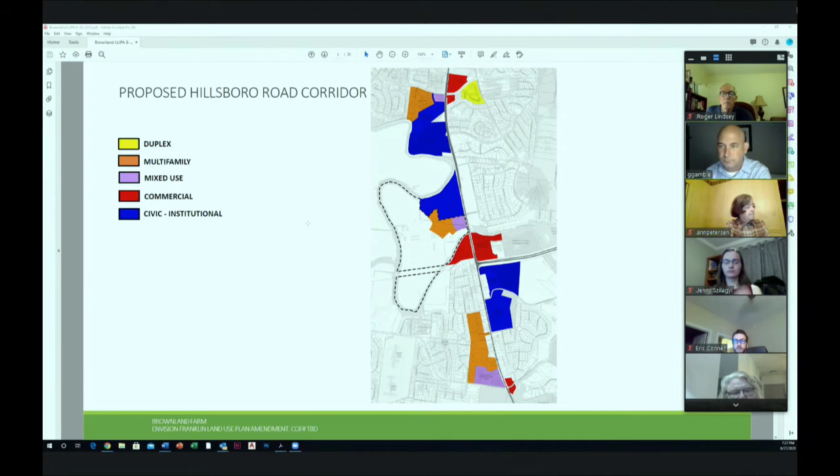The orange includes multifamily, and the purple includes mixed use. So along Hillsboro Road, there's a mixture of single family detached homes with localized commercial mixed use areas and multifamily. Our previous plan showed a total of 27.9 acres of multifamily and 7.1 acres of mixed use. Following the joint conceptual workshop, we have reduced those two areas significantly — multifamily is now 16.1 acres and mixed use is 6.1 acres.

Within the multifamily, we have an area set aside for senior living or assisted living facility. It's currently within the area owned by Christ Community Church and is zoned civic institutional, so this use is allowable within the civic institutional base zone that's on the property today.

The additional multifamily area we're referring to is here in orange, just below our main entrance road, and would consist predominantly of for-sale condominium homes with a few for-rent multifamily apartments.

We had our sixth neighborhood meeting last night with great involvement and engagement, and discussed the mixed use buildings shown here. Several neighbors asked us to increase the distance off of Hillsboro Road to provide more landscape, and gave us comments that they like the mixed use component to allow for maybe a restaurant, coffee shop, some live-work offices or office lofts close to their neighborhood.

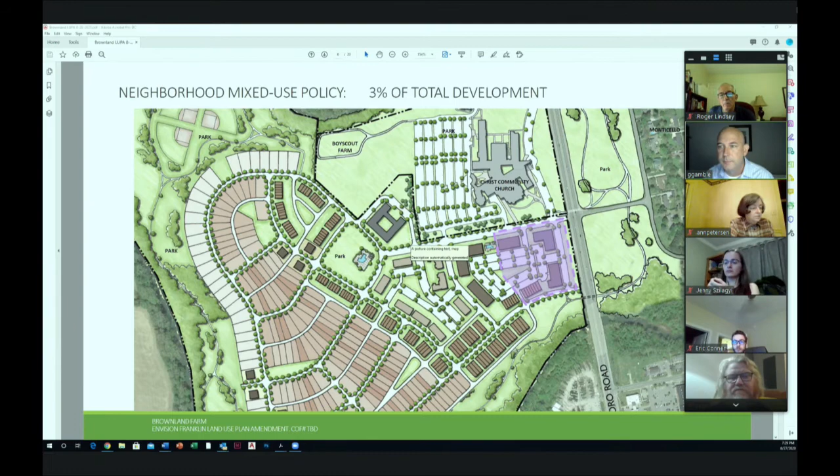We are also addressing the scale of the buildings on Hillsboro Road in our future plan. Again, I understand you're not approving the plan tonight, but there is relevance toward the Envision Franklin Plan Amendment in reducing these buildings to two-story in scale. In our SketchUp model, you can see the relationship and proportion to the existing church adjacent to it — these would be the mixed use buildings here in the front along Hillsboro Road.

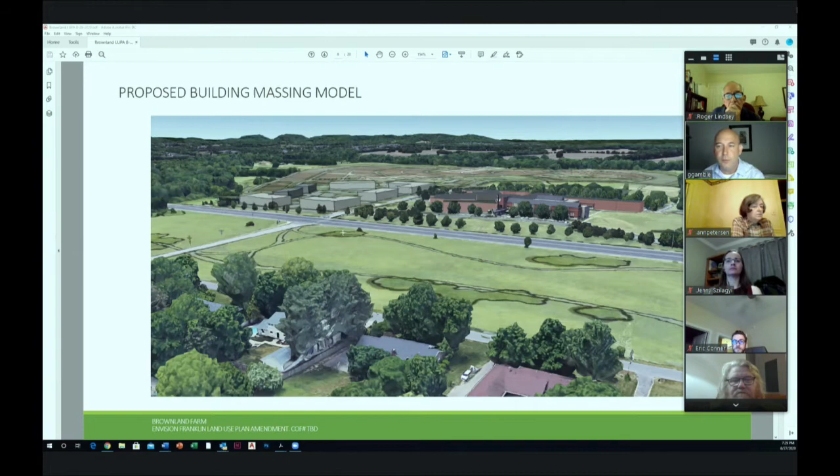So why are we asking for mixed use and multifamily? A lot of this goes toward language within Envision Franklin about creating a vibrant neighborhood. We are very excited about the opportunity to bring a mix of housing types — the condominiums and townhomes would be maintenance-free living, and it really caters to a much wider, larger group within the city of Franklin and meets more housing needs.

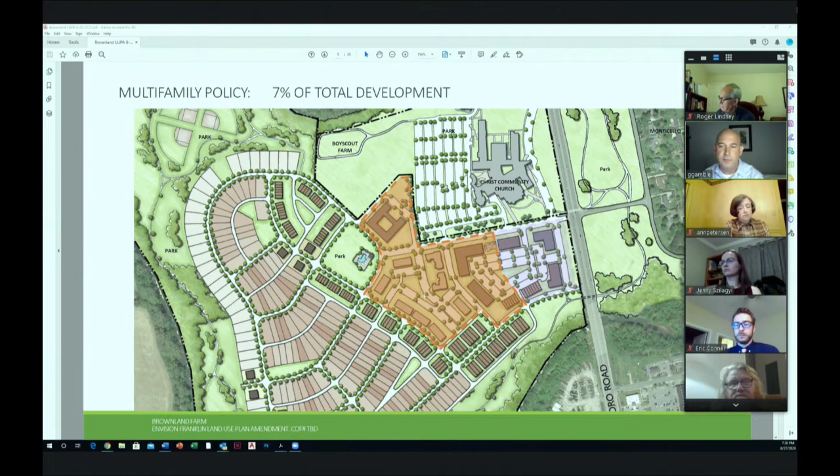We are committed to at least 10% of the homes within all the housing types being affordable housing, and we'll be working with the Williamson County Community Housing Partnership as well as the Franklin Housing Authority to create commitments associated with the deeds of these properties that would keep the affordable housing in perpetuity.

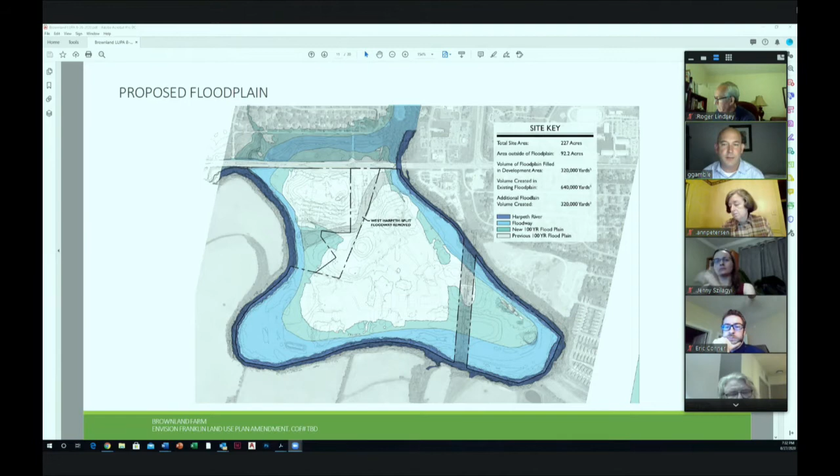This only would occur during a high water event. What we're proposing to do is redistribute the volume of the floodway. It does decrease the square foot area of the floodplain, but it does not decrease the volume. We have a total of 320,000 cubic yards of floodplain that we are removing, and we are adding back in 640,000 cubic yards, so we're doubling the storage capacity of the floodplain on this property.

To give you some real effect, this is to the south. Right here is where Mack Hatcher and Hillsboro Road intersect. Franklin High School is just to the south of us here. This is today's 100-year floodplain.

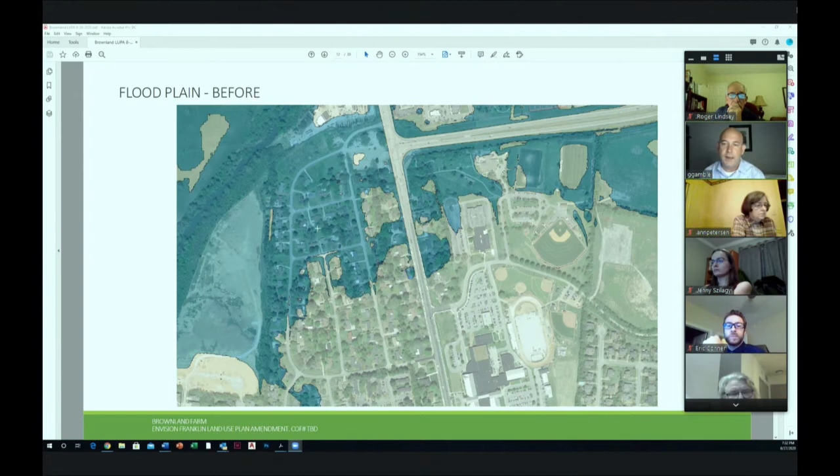After the creation of the 2-to-1 floodplain storage, you can see the real reduction in the effects on the adjacent properties. Several homes are currently in the floodplain, and that floodplain would be removed from their property.

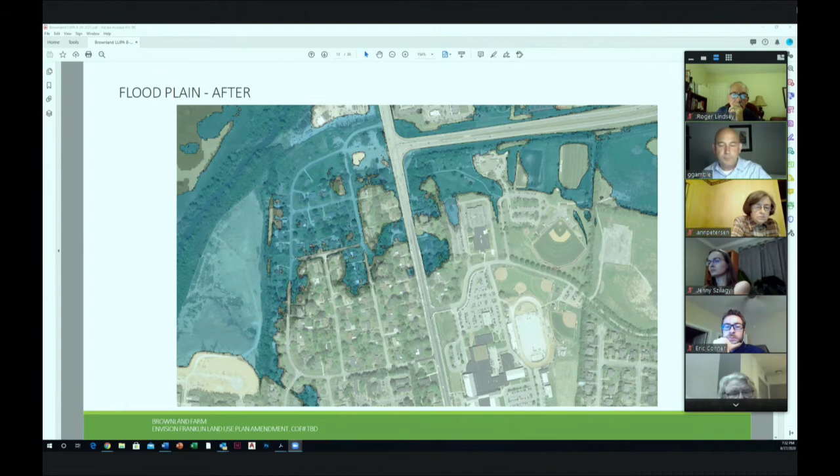If we move forward with the development plan, we have the ability to file the CLOMR prior to or concurrently with the development plan for FEMA's review. The CLOMR is typically not submitted until site plan, and when we go to site plan, there are some grading items subject to change that may require us to resubmit to FEMA. But for the comfort level the community has asked for, we would be willing to do that, and we'll continue to discuss this with the City of Franklin Engineering Department.

This is a comparison between Brownland Farm and Water's Edge. Water's Edge is a total of 195 acres in size, Brownland Farm is 227 acres. The development area created at Water's Edge is 92.1 acres, and the development area at Brownland Farm is 92.2 acres. The floodplain volume filled at Water's Edge is 290,000 cubic yards, and there were a total of 304,000 cubic yards created at Water's Edge.

This was prior to the city's requirement of a 1.5 to 1 creation ratio when filling in floodplain area. At Brownland Farm, we have the ability to double the amount of floodplain volume created, truly affecting those properties upstream and downstream. With the creation of the floodplain area at Brownland Farm, all single-family homes will be at least 3 feet above the floodplain, and no residential lot will have floodplain on it.

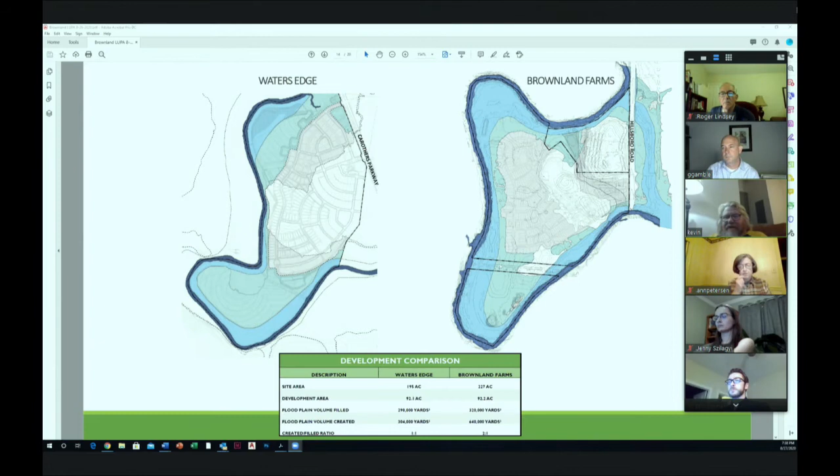I think we've lost Kevin's connection somehow. I apologize if I lose you. It says my internet connection is unstable.

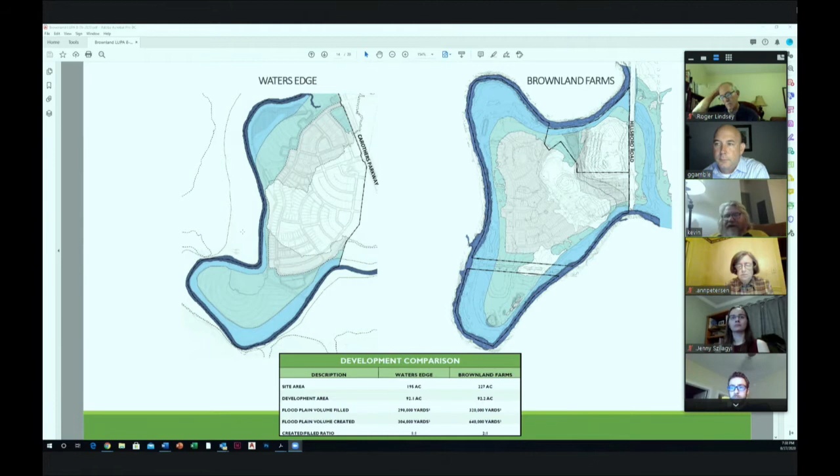We are basically just shaving the knob down. We can lower that elevation from 622 down to about 616, which is level with the bank, maintain positive flow, and we still have a sponge that goes from elevation 616 down to 598. We have 18 feet of natural sponge that would remain here, which is incredible. We don't have that in most floodplains to begin with.

We had a great meeting with the Monticello neighborhood last night. It was attended by dozens of people, and that was our 6th meeting. I try to wisen as I age, and what I ask them is, what is it y'all want? What is it that I can do to make my development be an asset to this neighborhood?

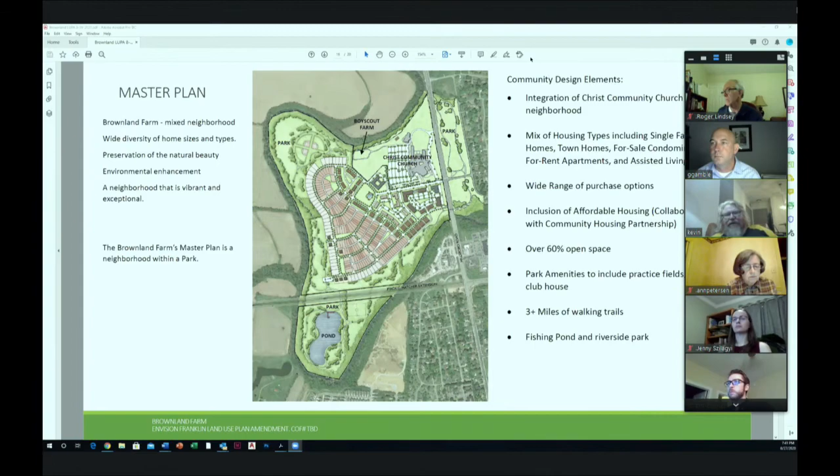But tonight, what we're talking about is a land plan amendment for, Greg, what's the exact area that we're asking to change here? It's 22 acres. Yeah, so it's 9% of the total property to multifamily and the neighborhood mixed use policies.

Not just that, but 12 of these acres we're purchasing from the church, which are already civic institution. And I think that's an important fact here, that a lot of what we're asking for is already out of the floodplain in this land plan, and belongs to the Christ Community Church that has already been changed to zoning of civic institution, which could allow things like assisted living.

So I wanted to speak slightly on the floodplain, and Roger and Mike, I know both are engineers. This Harpeth split is the craziest thing I've seen. We have ground elevations of 625.2 in several locations up in this floodway. This floodway cannot exist until it gets to elevation 626.

It is only 8/10, and then it flows through the detention pond of the church. In this floodway exists the driveways, the horse show attraction area, the high point of 625.2, and the parking lot of the church, and the detention pond of the church.

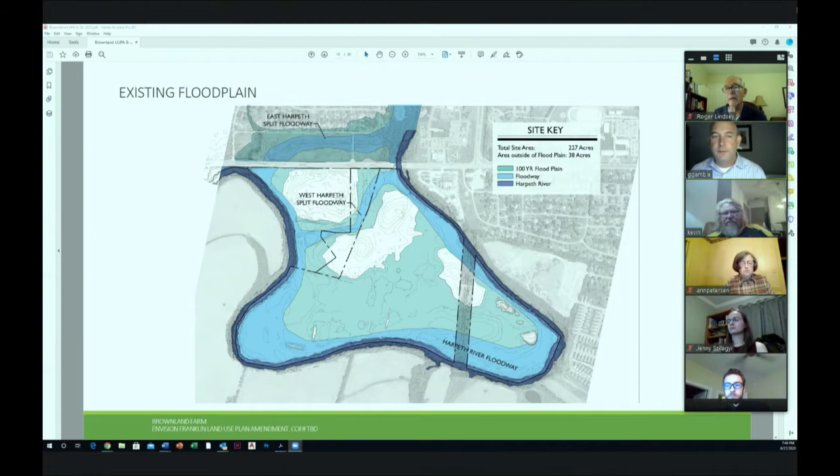So with that, we're interested in hearing your comments. We have requested deferral tonight to the September Planning Commission, and we'll present the traffic study findings the night of the September Planning Commission meeting. Okay, great, thank you. So from the Planning Commission, we've got a request from the applicant to defer to the September 24th Planning Commission meeting.

Do we have a motion to recognize that deferral? So moved. Is that Jimmy? Yes, sir. Second, Mike. Okay, so motion by Jimmy to defer to the September meeting, and seconded by Michael Orr. Did Marcia Allen ever join us this evening?

Okay, so Marcia's still absent. Jimmy Franks, your vote? Aye. Scott is absent. Roger Lindsey votes aye. Alma is still absent. Michael Orr? Aye. Ann Petersen? Aye. However, in our vote, whenever we're showing our vote, it said to adopt the Envision—is that going to be understood that we're deferring? Yeah, that's a motion to defer. Yeah, I see what you're talking about, Ann. So this is a motion to defer. And Jenny Szilagyi? Aye. Chairman Hathaway is recused on this item.

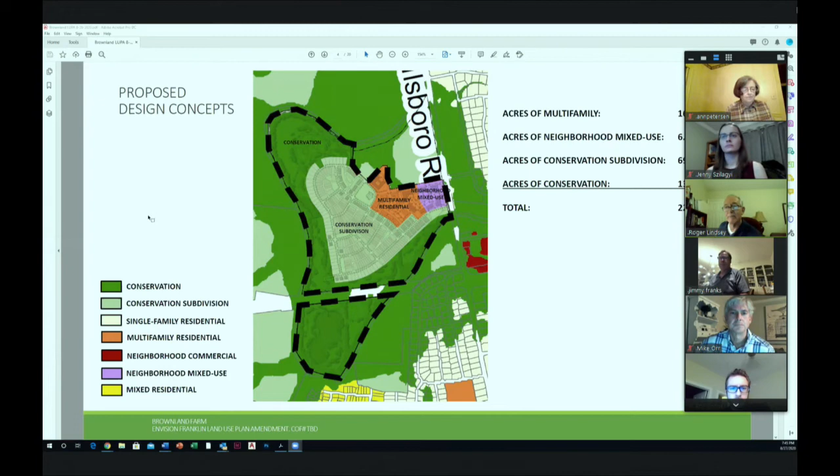So the vote passes, the motion passes to defer to the September 24th meeting. Thank you very much. Wait a minute. Okay, so we're good then. I'll return control of the meeting to Chairman Hathaway. Thank you, Roger, great job.

Staff: Thank you, Mr. Chairman. Just an electrical note—we just had a storm pop up here in Nashville and the lights just flickered, so if I cut out, that's why. The purpose of this revision to the Berry Farms Reams Fleming PUD Subdivision Development Plan is to revise the internal street network within the development. The subject property is comprised of 45.17 acres and is located at 1011 Reams Fleming Boulevard. There are no requests to revise the entitlements or change the development boundaries with this proposed revision, so therefore it is just a Planning Commission level approval, it will not go on to the Board of Mayor and Aldermen. The original concept plan for this property was approved in July 2006. A revised development plan incorporating the Ramsey Solutions headquarters campus was approved in March 2015. Staff recommends approval with conditions of the revised development plan for the Berry Farms Reams Fleming Tract PUD subdivision.

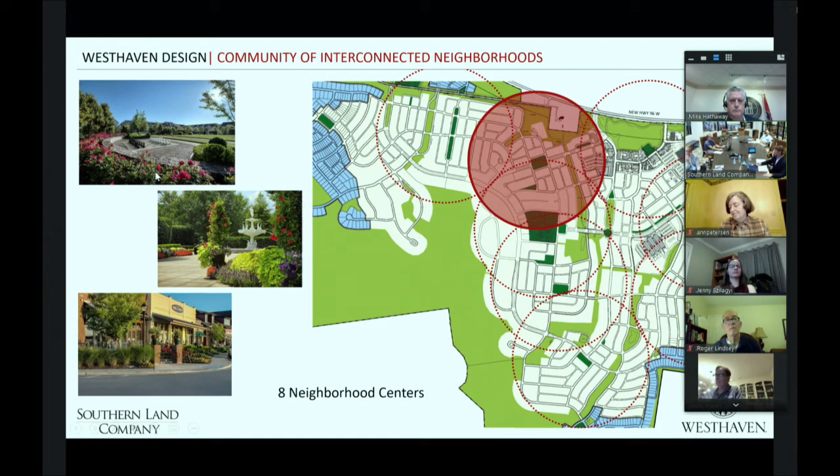So from Westhaven being a series of interconnected neighborhoods, the red circle is Founders Square - that's where the fountain is here on the left. And then from that point on, we have 7 more neighborhood squares in those outlined circles that really define the neighborhoods within those centers. Those are 5-minute walking circles, and they go from a commercial neighborhood to a very informal kind of square that we call Chess Park - a walkable and bikeable community, put together of many components.

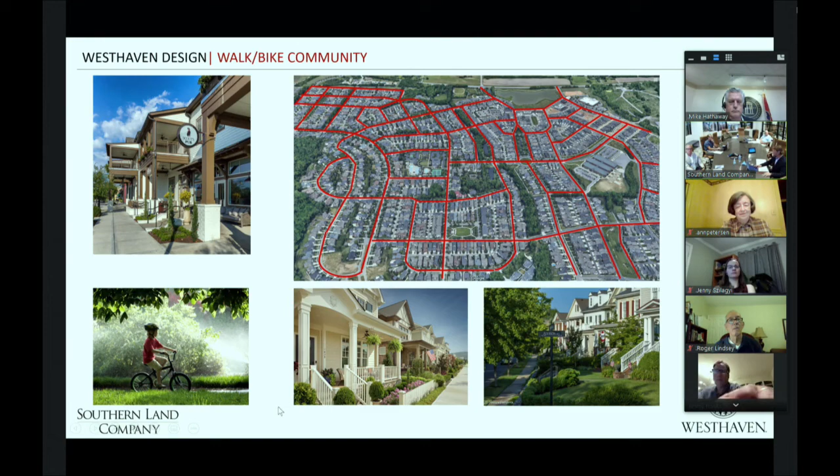One is a modified grid of streets that keeps the blocks short and allows people plenty of places to cross and walk. But it's also the detail in the walk - it only matters if you can walk, but if you want to walk between one place and another, that's what really matters. And then a place for kids to ride their bikes, learn how to ride their bikes, and feel free to move about the community.

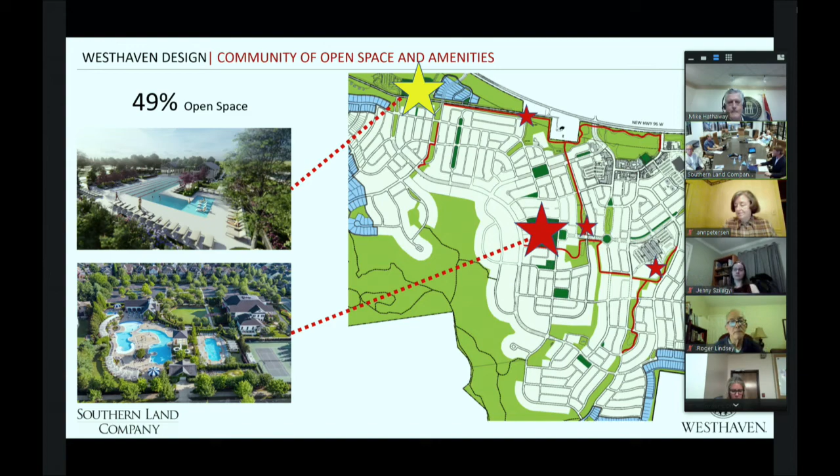And then a community of open space and amenities. We have 49% open space. The red stars are existing amenities, and the yellow star here is our pool that's actually under construction right now. Those are well placed and scattered throughout the community to make it convenient for our residents.

And then all of that would be for naught if we weren't really participating in making this a community of connection, allowing the events to occur, the activities that we sponsor to really make this place a community for people. And so we've applied all of those 3 main design concepts to what you're going to look at tonight.

Initiative 1 is on the west side, as Tim said. This is the property that we own, on the west side of Mack Hatcher. To orient you here, you'll see this map several times - this is Highway 96 and this is Mack Hatcher Boulevard. What we call Initiative 1 - I believe you got the letter we sent to our residents many months ago identifying this as Initiative 1 and Initiative 2. Initiative 1 is on the west side of Mack Hatcher.

What you see here is the yellow tinted lots are existing and the blue tinted lots are the proposed redesigned areas. So our current entitlements, as Tim said, are 500,000 square feet of commercial and 2,750 residential units. What we are proposing to do is remove 250,000 square feet of commercial and add 275 residential units.

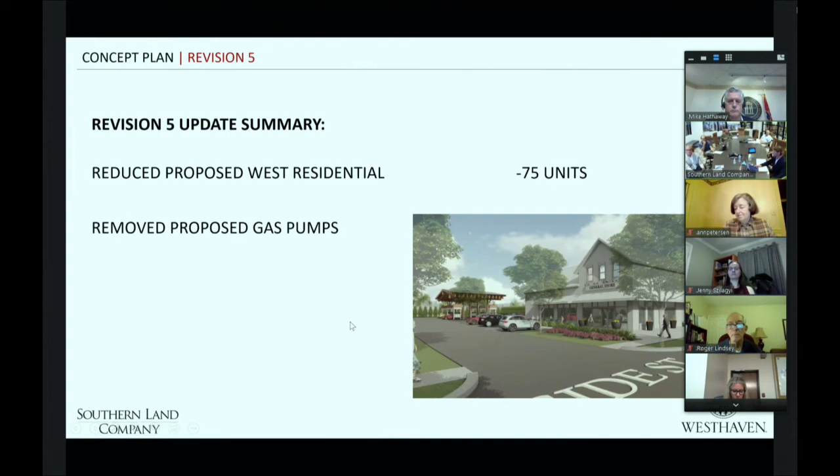In summary of what is different between today and what we proposed to you in May, as Tim said, we've reduced the west residential proposal by 75 units. And as Amy said - sorry, Tim corrected, we have removed the gas pumps from the commercial area on Townsend Boulevard from the proposal.

So the reason we're proposing these areas to be redesigned is that we're adjusting the housing sizes and types to match the existing Westhaven neighborhood. It's basically the same mix of lot sizes and types that we have in the yellow applied to the blue. We focus heavily on integrating the plan into the existing plan, and again we're taking that consistent design approach from where we started and applying it to these areas.

These are areas of interconnected neighborhoods. You can see we've built these neighborhoods around a central green here, and a central green here - so we have 4 new neighborhood squares. We want to make it a walkable community with a modified grid layout, and as you can see, the blocks are basically the same lengths.

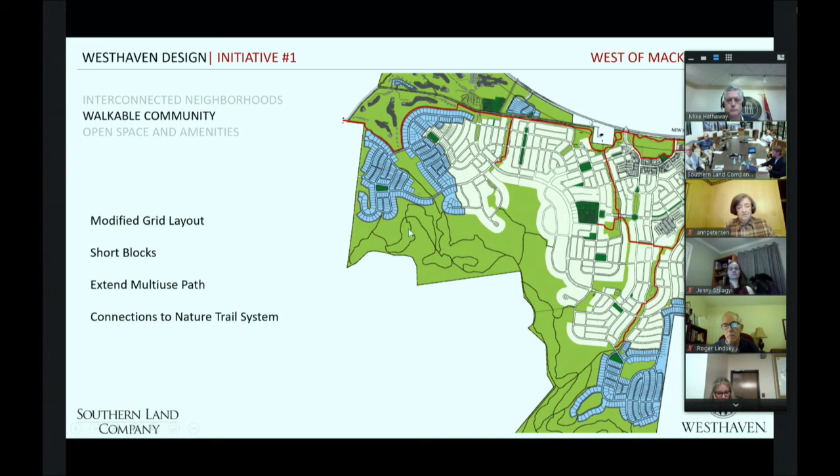Extending our multi-use path as per our original concept plan, and then making connections to the nature trail system. We currently have about 3 miles of multi-use path and about 8 miles of nature trail that we are very intent on making connections into the proposed areas of neighborhood.

And then open space is an amenity - we're still going to be at 49% open space. We're proposing to do 2 more pools, one of which is under construction, one is in the area over here. We are proposing 3 more playgrounds, 2 in more remote parts of the neighborhood, and 1 in the area here, where if you remember there was an 11-acre dedication to the city of Franklin for parks.

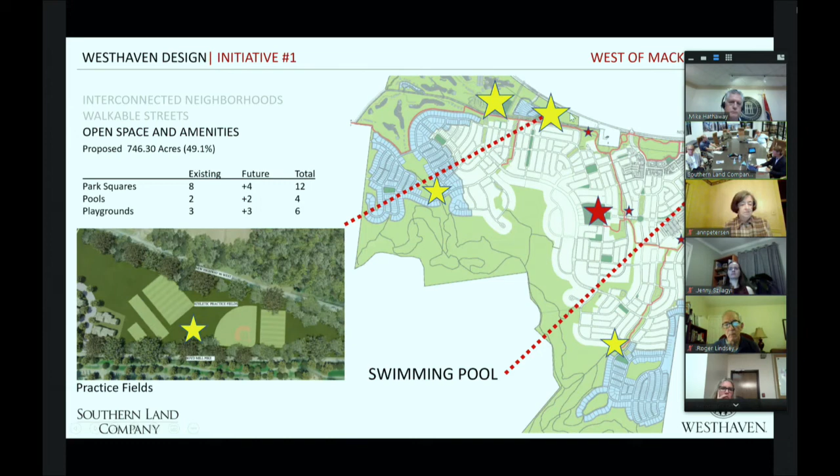And in our negotiations with the city, we've all felt it in our best interest for that to be taken back into the Westhaven property, maintained by the HOA. And we are proposing a dog park, playground, and practice fields in this area, which is between Boyd Mill and Highway 96.

So that's Initiative 1, on the west side. And we really want you to understand there are 2 separate initiatives - this is the east side of Mack Hatcher. And again, as we've seen Westhaven grow, we've gotten to understand who lives in Westhaven and sort of what their needs are.

Let me reorient you - you'll see this area zoomed in on the next couple of slides. But just to understand the scale in relation to the rest of Westhaven, this is where it sits. We see this as the front door to Westhaven.

It's not developed now, but we saw a real opportunity to do two things. One is extend Westhaven, making that approach from Boyd Mill, from the west side of Franklin, really consistent along the Westhaven property.

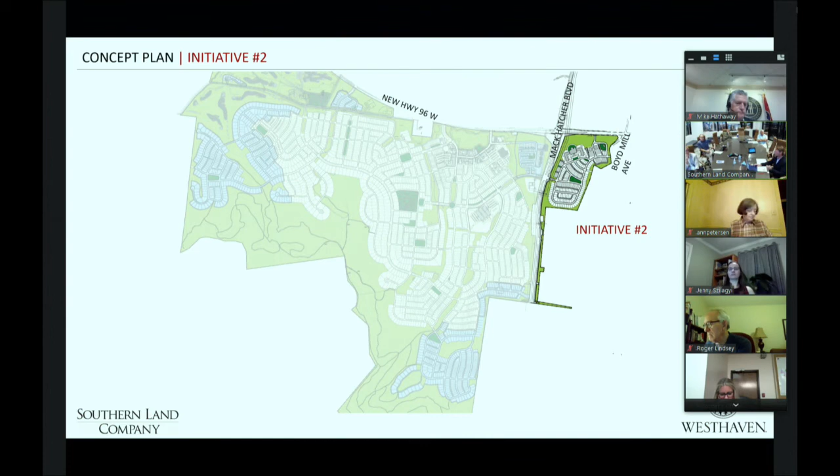But we also see a real need for aging in place. We have many multi-generational families living in Westhaven who now need to take that next step, not ready for assisted living, but ready for something that takes maintenance out of their lives and allows more freedom.

On the east side of Mack Hatcher, we're proposing zero commercial square footage and 416 residential units, again providing that multi-generational living opportunity at Westhaven, which is really the main focus of this area.

It will all be age restricted, maintenance-free housing, with the independent living facility somewhere in the 130 to 150 unit range, with a good number of exclusive amenities suited to residents' needs. There will be townhomes, condos, and villas on this site to provide diversity in housing.

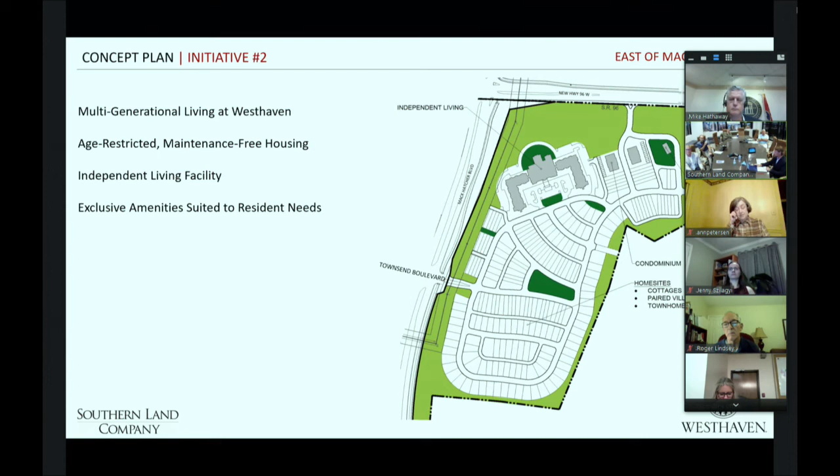Applying those same design criteria, this is an interconnected neighborhood with a central green that everything is focused on, while also allowing connections to Westhaven along Highway 96 and Townsend Boulevard, with multi-use path connections as well as street connections.

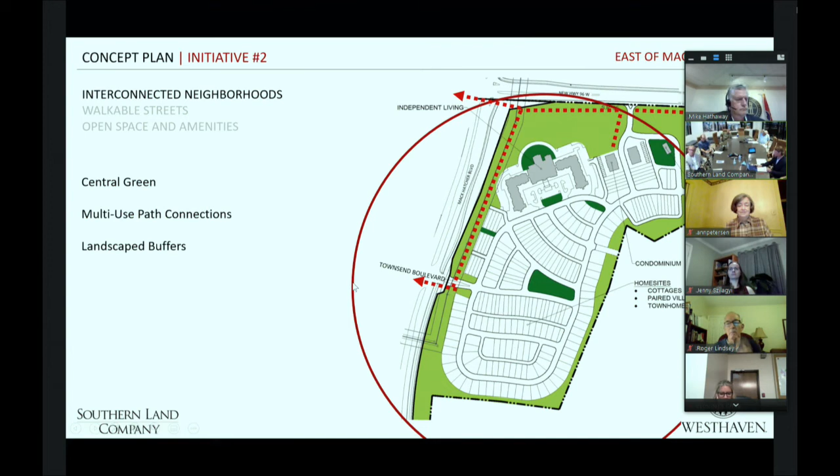It's going to be as walkable as the rest of Westhaven, and we're paying a lot of attention to how to get across Townsend. There might be some future accommodations needed, but as of now, Townsend Boulevard is the end of Mack Hatcher, and there will be a 3-way stop here.

There will be variable sized and well-scaled houses to provide a consistent streetscape, applying the same design guidelines as Westhaven has evolved throughout.

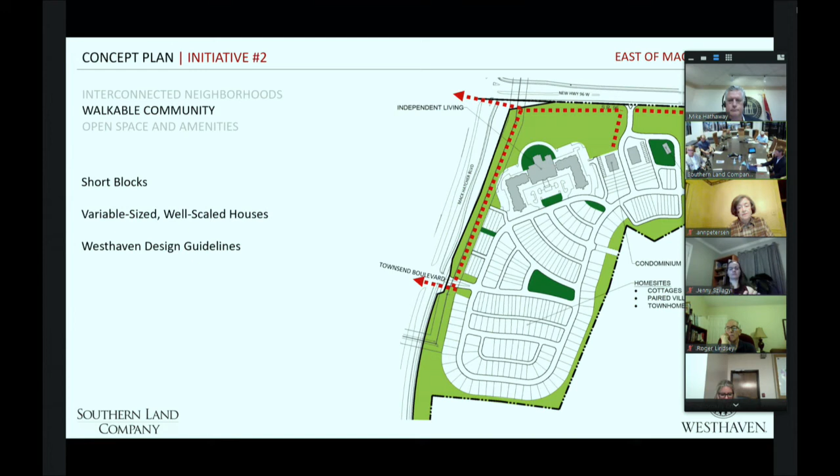Then open spaces and amenities - this side is 39% open space, including the setback we are maintaining for consistency with the rest of Westhaven, providing a nice transition as we get towards Boyd Mill.

And then age-appropriate amenities. One main amenity will be in the independent living facility, but also exterior amenities here, so this area will be well served by its own amenities without using the amenities across the street.

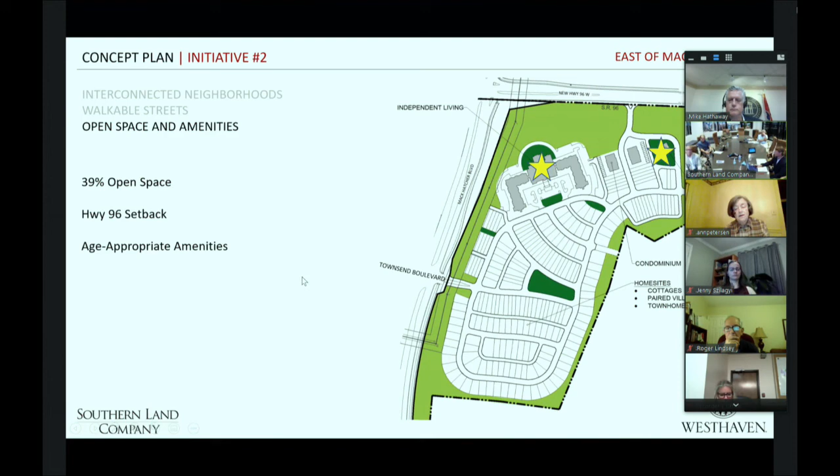I want to touch on circulation and transportation. We've designed Westhaven to be a modified grid that disperses traffic rather than concentrating circulation. It provides great walkability, but also multiple routes through and in and out of the community, so we're not concentrating traffic in front of any one person's house or on one particular street.

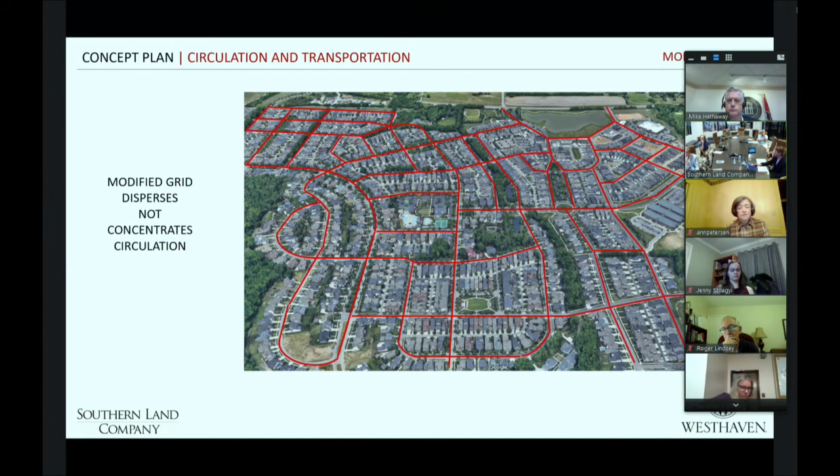We've been very intentional about where we're proposing to add residential units. 74% of that increase is directly adjacent to arterial roads, so 74% of any increase in circulation will be basically downstream of the current Westhaven residents.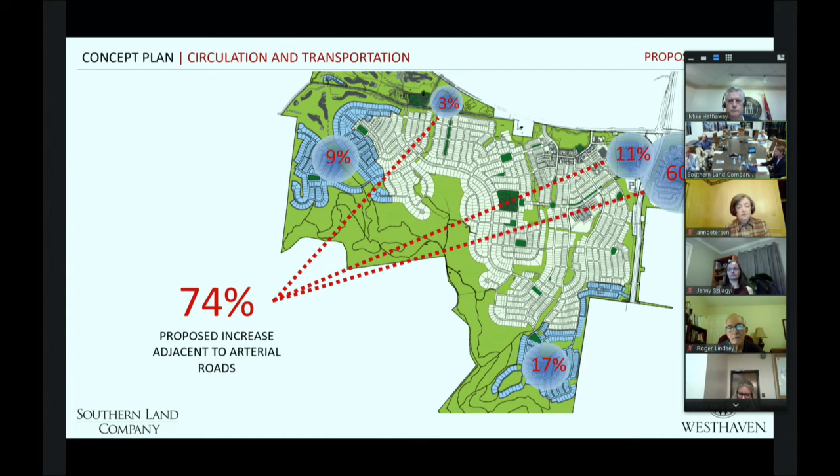The Westhaven traffic study confirms a 23% reduction in trips generated from our current entitlements. That's unusual, but with the reduction in commercial and increase in residential, we are still at a 23% reduction in trips.

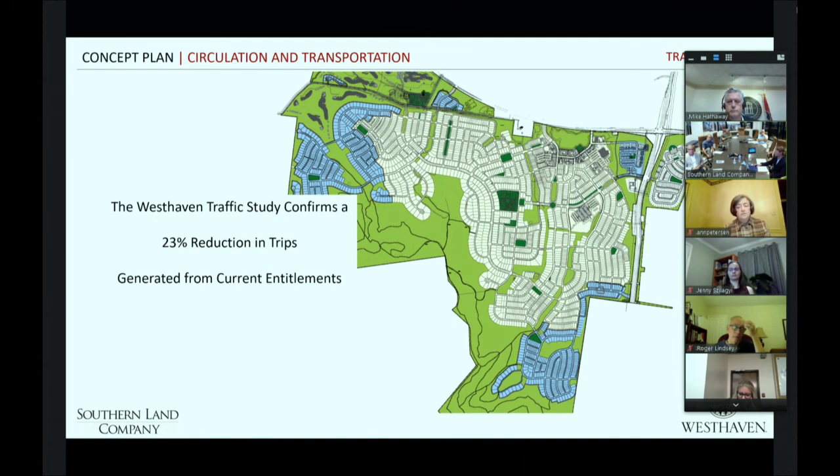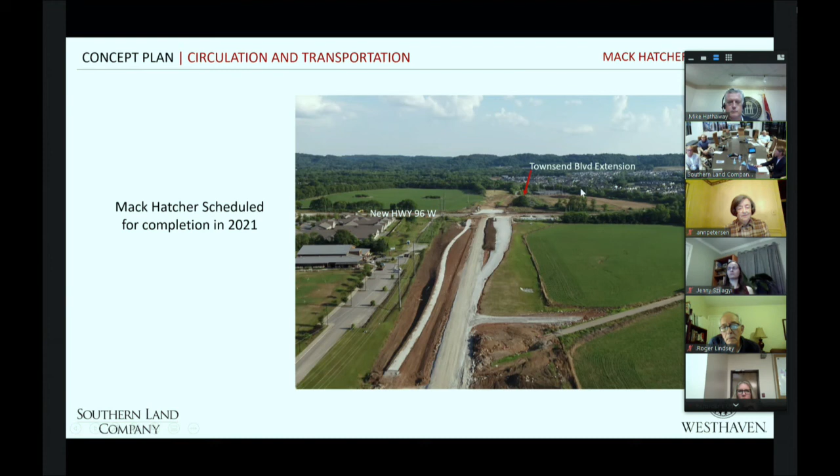We've spent the time since May, since our first meeting, in community outreach. We've had our public notice meeting, well attended by over 300 people back in December or January, plus over 20 resident and neighborhood meetings since then, and countless individual meetings. Something we heard is that we needed to provide more communication with our neighbors, so we've reestablished our resident advisory committee and are committed to multi-platform communication with residents.

So that's it for us on the presentation. We set out 20 years ago to build something extraordinary here, and I think we've gotten a good head start over this last 20 years.

We want to really apply those same design criteria, the same design guidelines, the same feel and quality expectation of Westhaven to these areas that are up for redesign in the Initiative #1 area, and also in our new Jewel property, providing a completely new offering that isn't there in Westhaven today. Thank you for your time, and we look forward to your questions.

All right, thank you, Ben. Just a reminder, this is a vote on rezoning this property. I will entertain a motion from the commission. Motion to approve, thank you Jimmy. Is there a second? Second, Mike. Michael, okay, all right, proper motion and seconded. Is there any discussion?